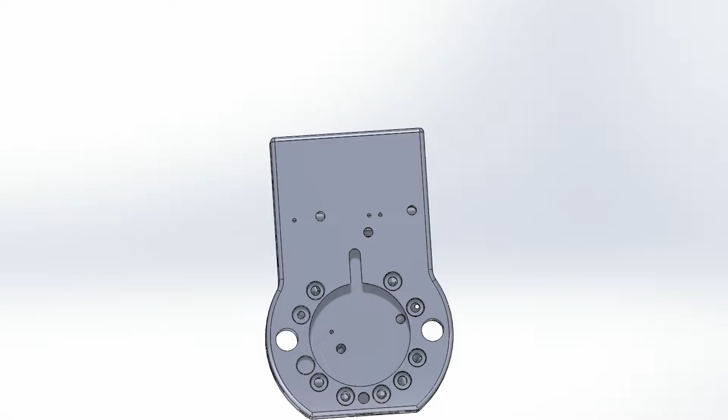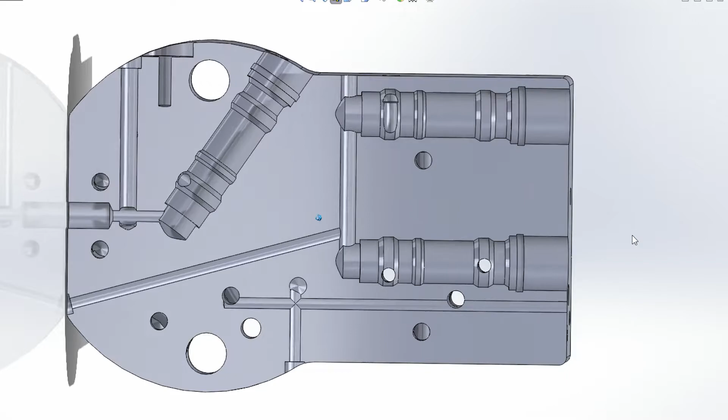This aluminum part that I was machining had 3 ports in it, and at the top of it, it had some O-ring grooves, and then below that, it had a chamfer that led into the main part of the port, and in the body of the port, it had 3 cutouts that angled outwards. And those cutouts are for some fluid that flows around whatever they're putting in there.

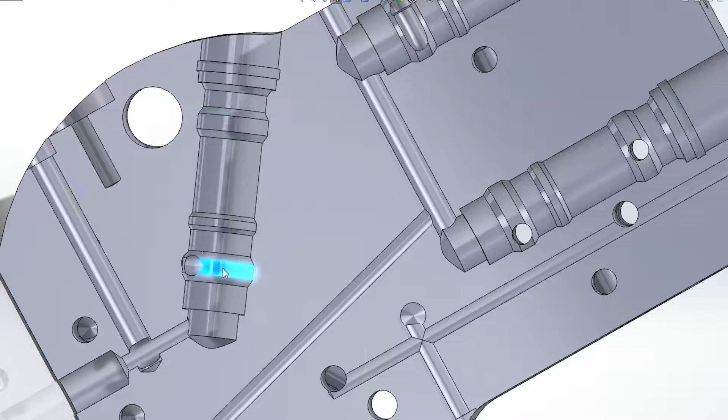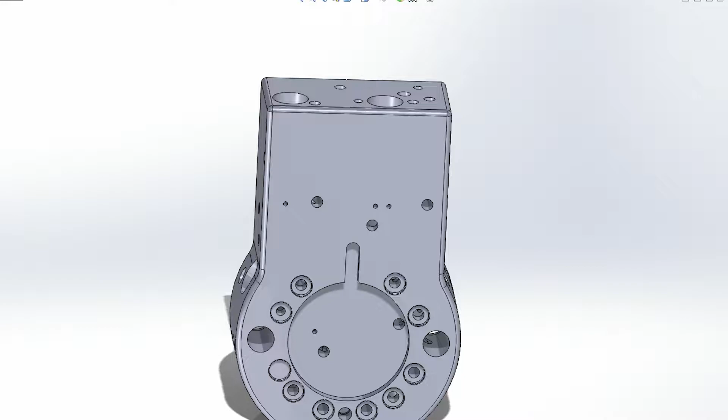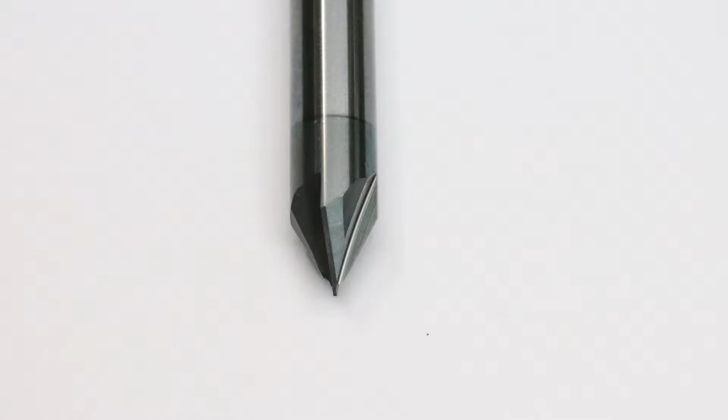And there wasn't a cutter that I could purchase that had the flats for those cutouts with the correct angles. So I needed a custom tool. I could have just made something simple and done something like this that had a flat with the angles and gone in there and done multiple cuts to get those cutouts made, and then also gone in with a tool to put in the chamfer, and then gone in with a tool to cut the O-ring groove.

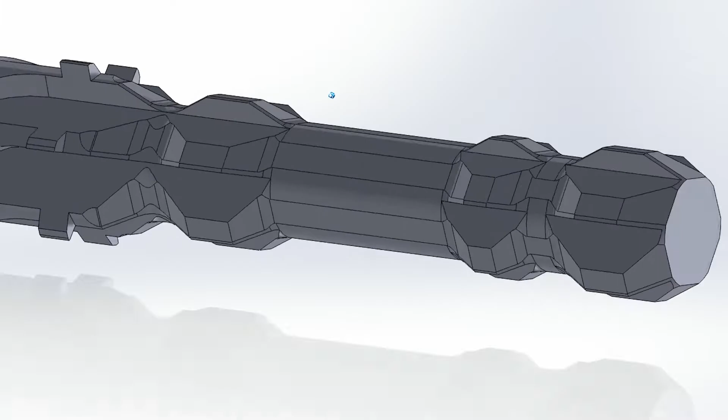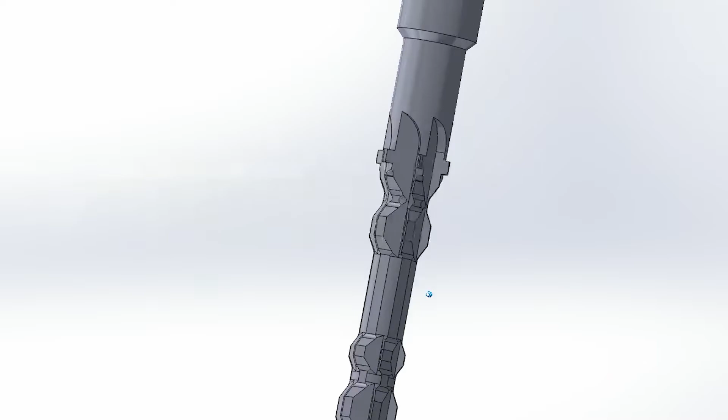But I was like, you know what, if I need to make a custom cutter anyways, might as well make something that can do all those cutouts in one operation. So I went into SolidWorks and designed up this tool here. As you can see, it's got all of the cutouts that need to be made at the spacing needed for that port. And all 3 of those ports were the same as far as the sizing and spacing of those cutouts. So this tool would just be able to go in there and do all of that at once, including the chamfer at the top and the O-ring groove.

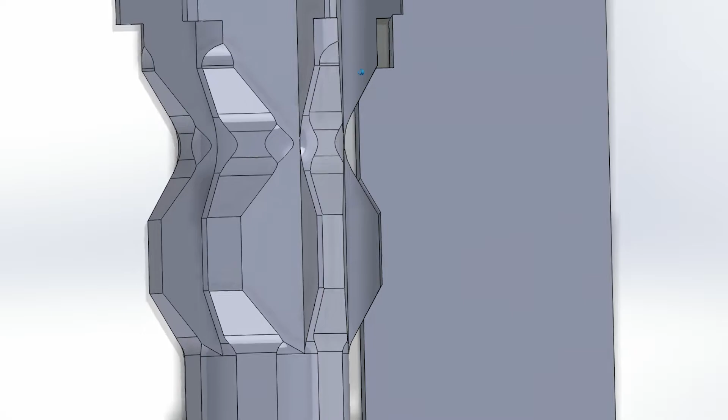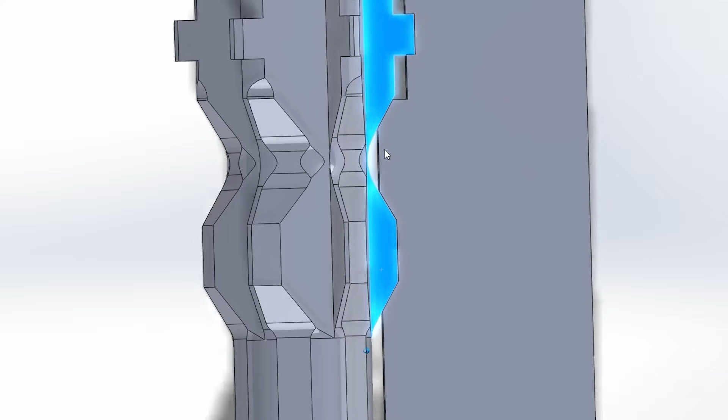So I sent this out to get quoted by some cutting tool manufacturers, and some of them didn't reply, and the ones that did said that they wouldn't be able to make it for me. And I was also getting the idea that if a company did quote it, that it would be a pretty expensive tool. So that was kind of a bummer because I was wanting to get this made out of some carbide, because carbide is a pretty rigid material and I wouldn't have to worry too much about deflection.

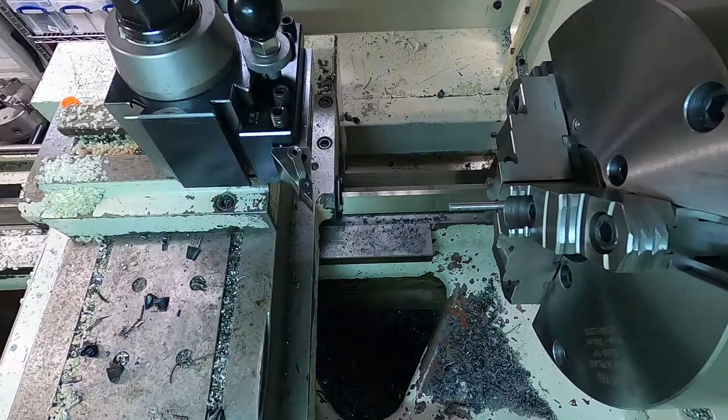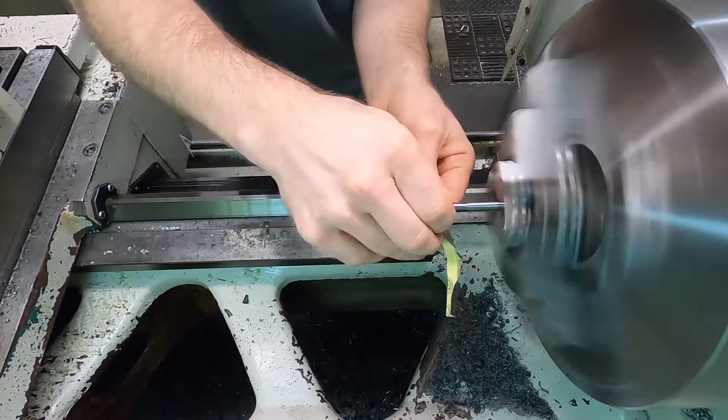But since I couldn't get this quoted, and I needed to get a tool made so that I get these parts made for my customer, I went ahead and ordered some M2 tool steel and decided to make this cutter myself. The inner diameters of that port are relatively tight, while the cutouts are not. And so I'm going to be going in there with a boring end mill to bring the ID to size, and then just using this cutter to put in the cutouts.

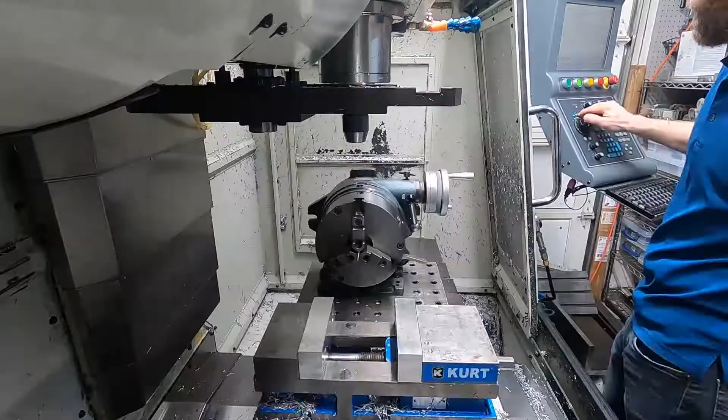So I started out and I turned the profile of the tool on the lathe and polished it a little bit. And once I got the turning done, I took it over to the mill, and I had a manual AccuDex that I used for rotating and positioning the tool for cutting the flutes. And the way I went about cutting the flutes was I went in there with an end mill and I cut the flat areas that would be the cutting surfaces of the tool.

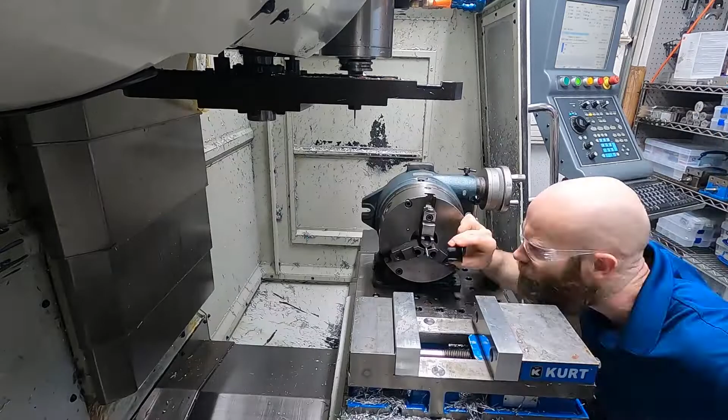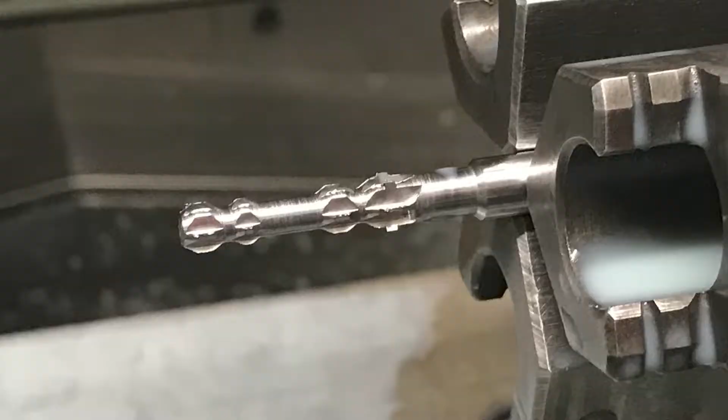And then I rotated it and cut the relief angles around the profile of the shape of the tool with an end mill that went down and cut on the sides to cut those relief angles. So once I got the flutes cut and the relief angles cut, this is what the tool looked like. And as you can see, it had some burrs on the tool. But that was no big deal. I just did a little bit of deburring and knocked those off.

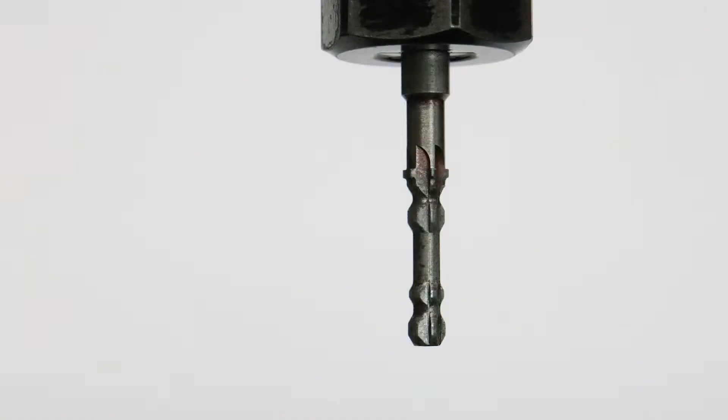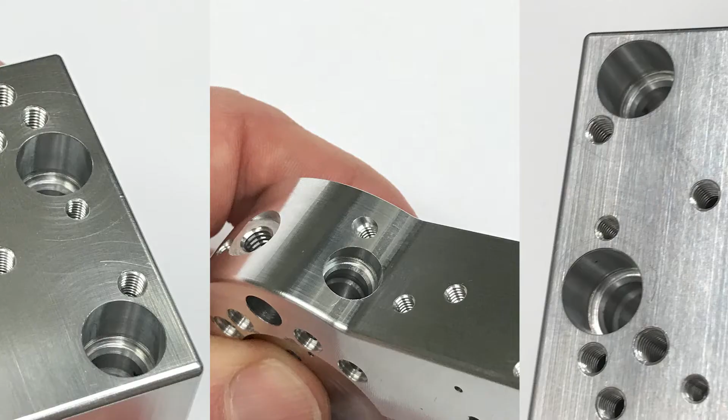And this is what the tool looked like when I got it back from heat treat. And then I went in there and cut the ports, and the tool did a pretty good job. It did knock up some burrs after cutting, so I had to go back in there with my ID tools to clean up the burrs after cutting with this tool, and it worked pretty good. Got the job done.